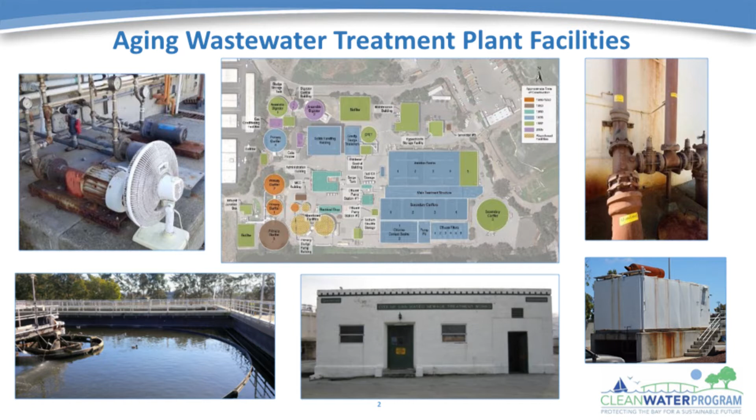And in some peak wet weather conditions, meaning when there are big, out-of-the-ordinary heavy storms, the plant facilities that don't have sufficient capacity to treat the amount of wastewater start to fail. In simple terms, there are leaks and failures, and that is not good. Because of the issues, the city is currently in serious risk of violating these environmental regulations. And that's just the wastewater treatment plant. I haven't even touched upon the other part, which is the collection system.

Typically, a sewer lateral connects your property to the city's collection system. And once it's in the collection system, there is a network of pipes, manholes, and pump stations that help to move everyone's wastewater to the treatment plant. Some of these facilities are multiple decades old, while some are newer. But regardless of if they're newer or older, once they are in the ground, they start to age, deteriorate, and even fail, just like some of the images on the screen. It's a cycle that never stops.

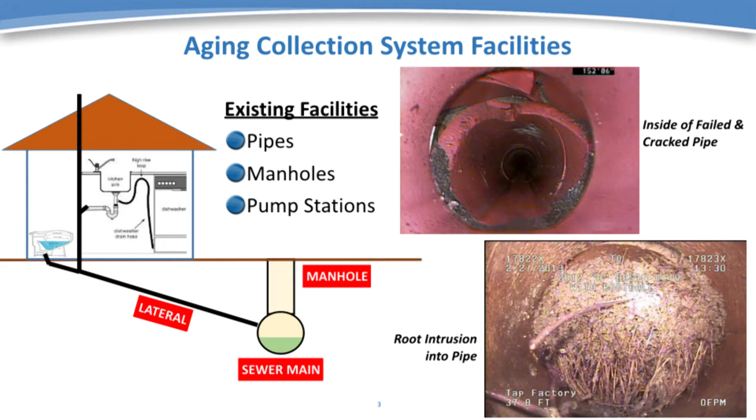So every year, the city uses funds collected through your sewer bills to maintain, repair, and replace portions of the system to help keep it operational. And even with all these annual efforts, there are still capacity issues during peak wet weather events. Now, I keep mentioning the words capacity and the term peak wet weather events. So let me dive into this a little bit more.

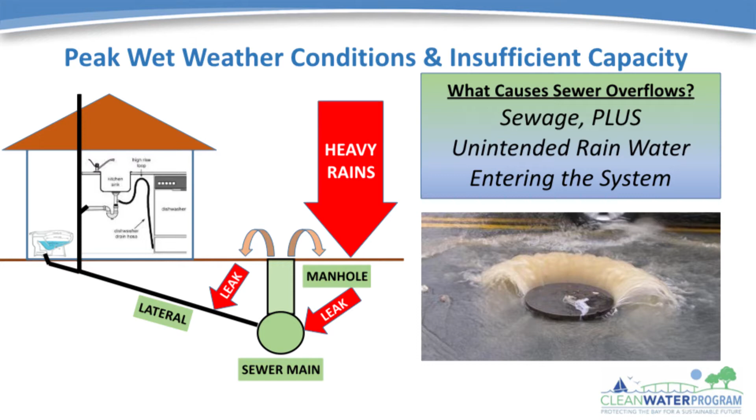During dry weather or normal conditions, such as a nice summer day where it hasn't rained in weeks, the sewer system runs fine and there is more than enough capacity in the system. But during peak wet weather, the rain infiltrates into the ground and leaks into the sewer pipes through the cracks and failures in the system. The heavy rain mixes with the raw sewage and increases the amount of wastewater in the pipe to the point where there is no more room or capacity in the system, and the only place left for the wastewater to go is up. And typically, the city and the community sees these types of overflows occurring in manholes in the streets. These types of capacity failures are called sanitary sewer overflows.

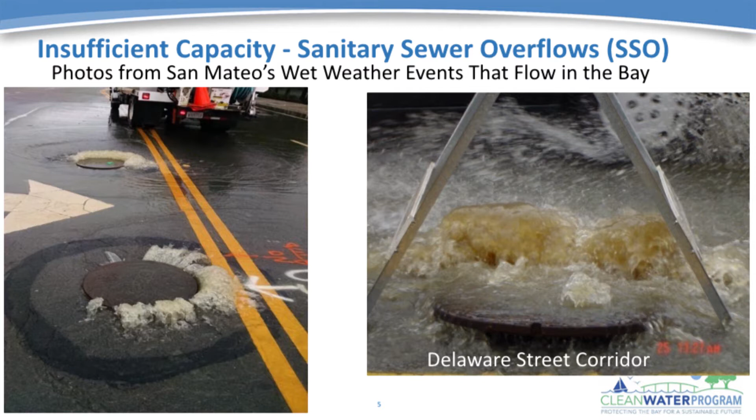We refer to them in acronyms as SSOs, or simply it's an unintended leak. That is diluted sewage overflowing onto our streets. Imagine you have a glass of sewage and you dump it into a bucket. Then you take 10 glasses of clean rainwater and you also dump that into the same bucket to dilute the sewage. Would you feel safe or healthy touching or being anywhere near that bucket? It is diluted, but it is still disgusting, not safe, and not healthy.

These overflows happen in both our collection system and our treatment plant, sometimes for several hours. And once they gush onto the streets, they go into our storm drains. And from the storm drains, they flow into our creeks, then into our lagoon, and eventually into our San Francisco Bay. We've had to put up warning signs at our beaches and close them because of the amount of contamination in the water. This is a significant health risk for both the community and the environment.

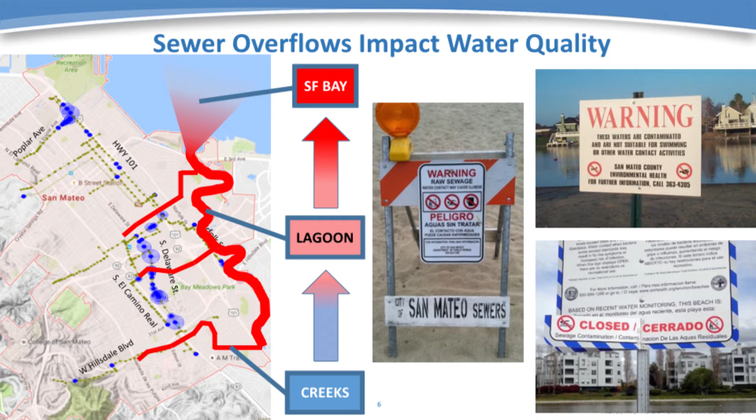This has occurred in the past, and it will, without a doubt, continue to occur in the future if we try to maintain the system the way it currently is. So in order to stop it, we need significant improvements because we need to improve.

Thing is, the city of San Mateo isn't the only one to have noticed. The California Environmental Protection Agency's Regional Water Quality Control Board also noticed, and their job is to ensure that everyone in California is keeping California waters clean. They have done two things to make sure that the city of San Mateo is trying to meet their regulations, or actually meet their regulations.

The first is they've set stricter discharge requirements for our treatment plant, meaning we need to improve our treatment processes at the plant to meet higher levels of discharge quality. The second is they've issued a cease and desist order mandating the elimination of SSOs or overflows, and they're requiring specific corrective actions that we, as a community, have to take. If they say jump, they tell us how high and we must comply.

We're not in a good situation, but the city has a plan to address these issues. It has developed the Clean Water Program, and the drivers and goals of the program are simple and straightforward. The first goal is to replace key components of the aging infrastructure in the collection system and the wastewater treatment plant. The second is to comply with current and future regulations by providing higher levels of treatment and capacity assurance.

This means we are striving to improve the treatment processes at the plant and to eliminate sanitary sewer overflows throughout the entire system. The third goal is to align with the sustainability goals of the city. We want to make sure that what we are doing is good for the environment and good for the community, both now and in the future.

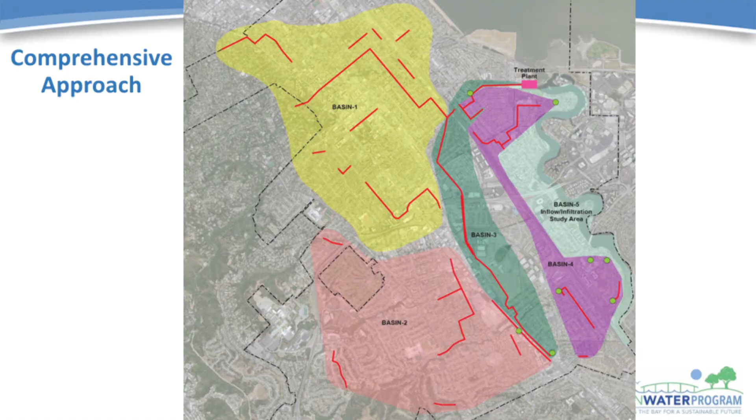The red lines indicate pipeline projects, the green dots are pump station projects, and the pink rectangle in the northwest, or northeast actually, is the wastewater treatment plant. The only thing not shown in this comprehensive map is the location of the underground in-system storage, which will be determined later this year.

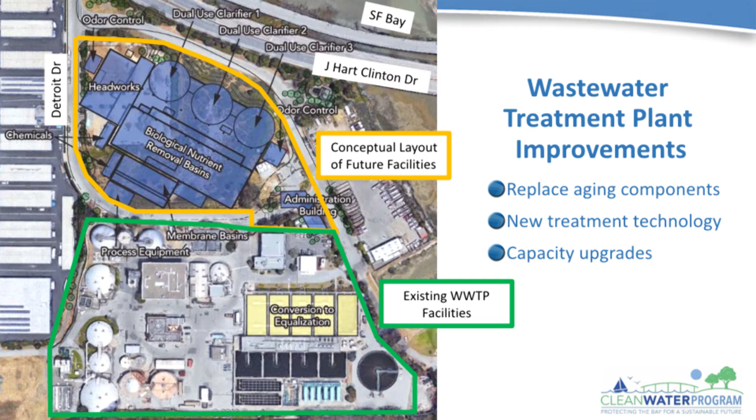The different buildings are facilities that each play a key role in the treatment process. These were first constructed in the 30s and 40s, and since then it has grown and expanded with new facilities. Lots of maintenance and rehabilitations have occurred since then, but there have not been any significant expansion projects for decades.

The upper half, which is outlined in orange, is the conceptual future facilities that will replace some of the older facilities. And these are newer technologies that will help to provide manageability as well as operational efficiencies that will meet environmental regulations and overall improve system capacities.

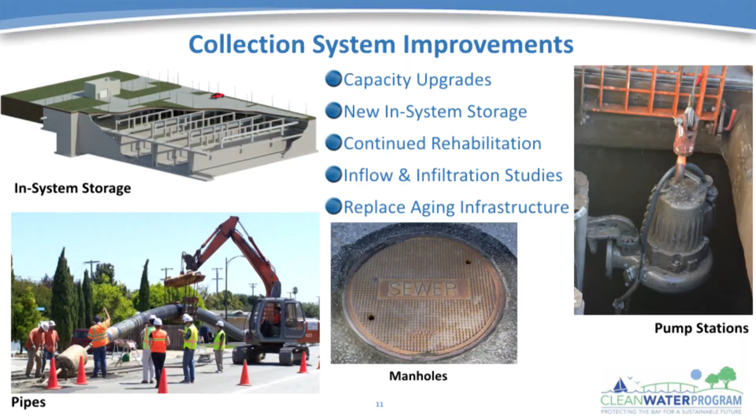Moving on to the collection system, if you remember the comprehensive map, there were a lot of red lines and green dots. And there are significant improvements planned for the collection system. There will be a new underground in-system storage tank. There will also be several pump station upgrade and rehabilitation projects, and there will be a significant number of pipeline projects. The city is also conducting infiltration and inflow studies, along with doing its continuous annual collection system investigations and rehabilitation projects. All of these improvements build capacity and enhance operations and manageability of the system.

These are improvements that are funded by the sewer charges that you provide to the city and allow us to do these improvements. What will happen if we don't do these improvements? First, more aging, deterioration, and failures will occur in our system. If we wait longer, it won't be as reliable. Sewer service is supposed to be continuous and reliable.

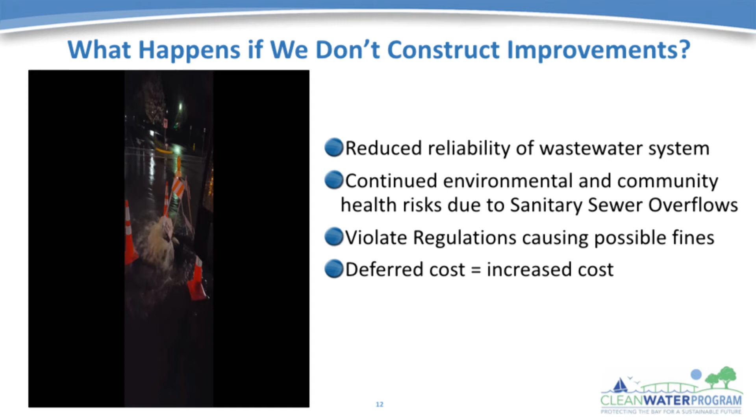In the system's current state, overflows will continue to occur, and this is a big health risk. The Environmental Protection Agency will not like that we are violating the regulations, and this could result in fines to the city that will get passed on to you, the ratepayers. The longer we wait, the more expensive it will cost.

It's kind of like my first car, which was the 1982 280ZX. I drove that thing everywhere, all over the Bay Area, and it got me where I needed to go, most of the time, but not all the time. It also leaked oil on my driveway, and it stopped passing smog tests and wasn't meeting regulations. Just like that, I needed a more reliable car, just as we need a more reliable system that will help improve capacity and meet regulations.

As I said before, infrastructure problems need money to fix. Now, the Clean Water Program and all of its projects is estimated to cost $900 million. This is the cost for the improvements at the plant, the collection system, and ongoing operations and maintenance needs. The initial program was 20 years, and it has been condensed to be implemented over 10 years. This reduction in duration not only saves costs on interest and escalation, it also meets the goals of the program and will provide benefits sooner than later.

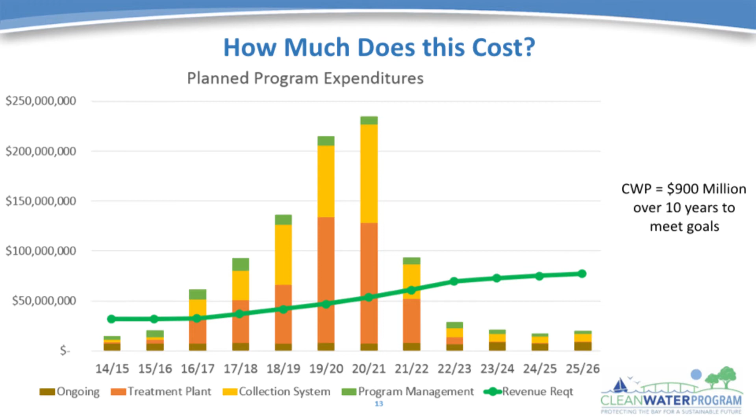The revenue requirements shown by the green line are the amount needed to pay off the financing, and it's kind of like a car I ended up buying to replace my old one. I ended up financing it because I took out a car loan. Instead of paying for the full value of the car up front, I pay a small portion each month. The revenue requirements for the Clean Water Program shown on the graph are kind of like the income that I needed to make in order to pay off my monthly car payments.

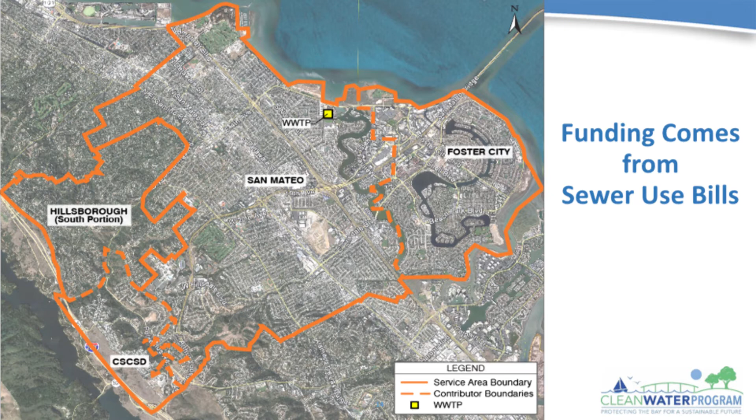So sewer use fees are paid by all properties or entities that connect into the sewer collection system and/or contribute to the flows of the treatment plant. This map shows the outer service boundaries. It's not just San Mateo properties that pay for the service. Foster City, Hillsborough, Crystal Springs County Sanitation District, and several agencies pay for the service and contribute to the revenue needed to fund the program. Essentially, all connected and serviced users pay their fair share.

The current sewer fee structure is 100% volumetric, meaning the more you use, the more you pay, or the less you use, the less you pay. There are two components needed to calculate a sewer fee. The first is the rate.

The charge rate is determined based on revenue needs, and as you saw in previous slides, the revenue needs are growing. The second component is the usage. This is based on average winter water usage, which excludes outdoor irrigation.

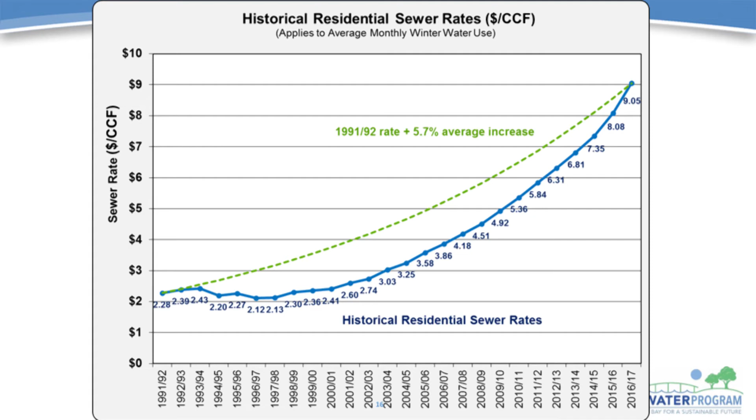These are fiscally responsible rate increases that provided the revenue needed to fund the operational and maintenance costs over the past few years. And due to Proposition 218, the city is not allowed to overcollect, nor are we allowed to set rates above what is required for the estimated revenue needs. The revenue needs have increased due to the improvements needed to meet the regulations, and so the rates have to increase as well.

So, as you know, California has been in a drought the past couple of years, and we've been doing a really good job at conserving water. However, since sewer fees are based on winter water usage, the water conservation efforts have resulted in unanticipated shortfalls in sewer fees collected over the past few years. This slide helps to illustrate an example of these impacts.

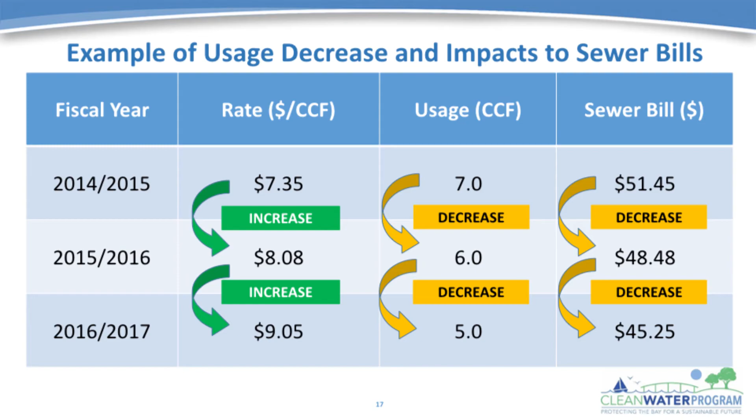Between fiscal year 14-15 and 15-16, the city raised rates by 10%. The following year, it raised rates by 12%. Ideally, the goal of this was to increase the revenues that were brought in through sewer bills. The sewer rate increases bumped up the rates from $7.35 to $8.08 to $9.05.

And even though the rates were being increased, there was an unanticipated decrease in the usage, which negatively impacted the fees collected. Even though the city raised rates, lots of properties still did not pay even more. They basically paid the same. In other words, the actual revenue received through sewer fees has been lower than the anticipated target revenues.

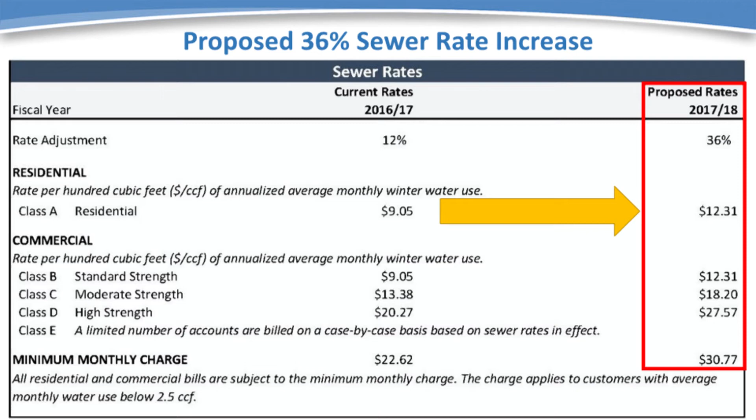I also wanted to talk about the usage part of the equation. Over the years, the average usage has decreased, and it is currently around 500 cubic feet of usage per month. To give you a sense of perspective, 500 cubic feet is approximately 125 loads of laundry or 150 showers that each last 10 minutes. That's the average usage per month. There are also properties that are low users, and there are properties that are high users. Now remember, because of the 100% volumetric structure, the more you use, the more you pay.

So let's focus in on the average user indicated with orange arrows on the slide. Currently on the left side, the monthly sewer charge is $45.25 for the average residential dwelling unit with 500 cubic feet of monthly winter water use.

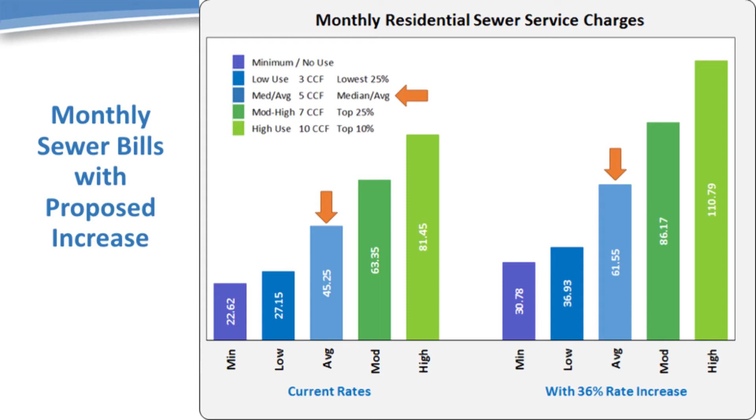The proposed 36% rate increase would increase the average charge amount to $61.55 per month. Remember, if you use more, you'll pay more. If you use less, you'll pay less. The minimum monthly charge also would increase from $22.62 to $30.78.

I also wanted to point out that this only shows the updated numbers for City of San Mateo's increases. Currently, many of our neighboring agencies are also undergoing the Proposition 218 sewer rate increase as well. And so once they are done with their increases, the overall landscape of this chart will change.

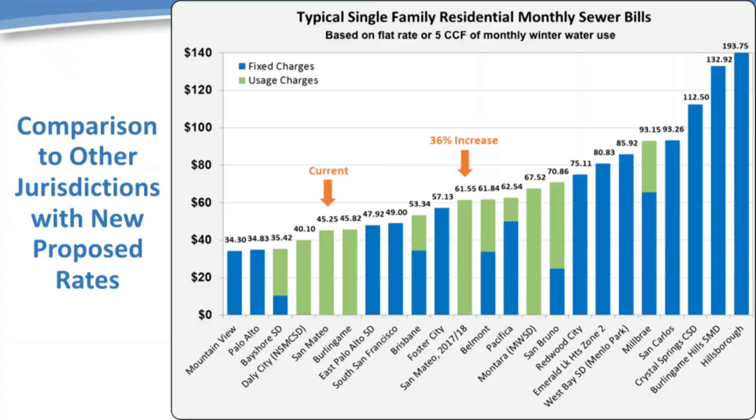Now that you know the proposed sewer rate increase for fiscal year 17-18 and how it compares to our neighbors, I wanted to conclude with saying that we aren't just raising rates just to do it. The increase is supposed to align our actual revenue needs with our target revenue needs. It will help to fund the city's continuous operations and maintenance activities, as well as help to fund the projects and improvements of the clean water program needed to replace our aging infrastructure, meet current and future regulations, as well as align with the city's sustainability goals.

Now, I wanted to transition to talk about planning for the future. To plan for the future, the city wants to establish revenue stability and predictability. Planning efforts and studies continue to be conducted on how the city should establish this stability and predictability. And there are two key ideas that I want to preview with the community through this presentation. This year, the city is proposing a single-year 36% rate increase. The two key rate considerations that I want to preview with you today are, the first is rate restructuring, and the second is multi-year rate increases.

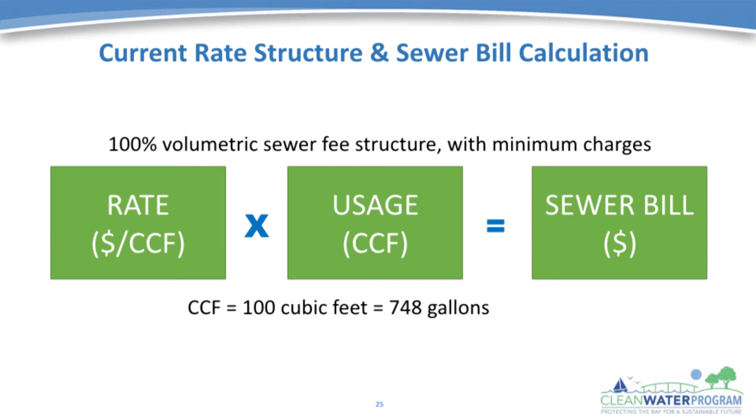Remember this slide? I want to share this with you again to remind you that the current rate structure is 100% volumetric, meaning the more you use, the more you pay. And remember this graph also? One thing that I didn't talk about on this slide the last time was the different colors for the bars. We added a larger legend indicating the green bars are for volumetric charges, while the blue bars are for fixed rate charges. You know that for 100% volumetric structures, the more you use, the more you pay. For fixed charges, it doesn't matter how little or how much you use. Residential properties typically pay the same fixed amount regardless of usage.

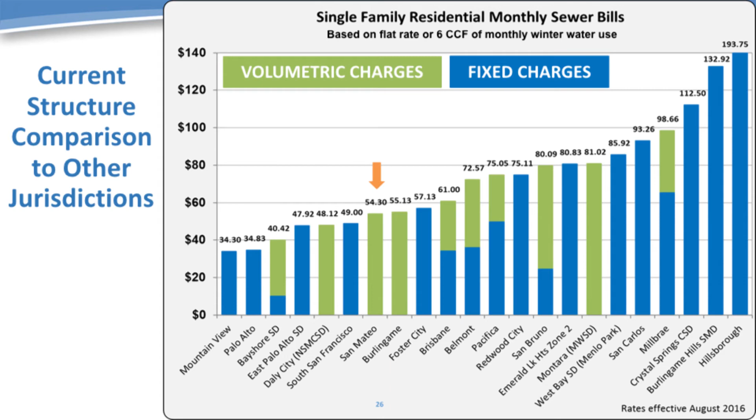If you look across the chart, there are 12 agencies that are all blue and have 100% fixed structures. 4 agencies have 100% volumetric structures, one of which is the City of San Mateo. And lastly, there are 6 agencies that have hybrid structures. Please notice that not all the hybrid structures are the same. For example, Belmont in the middle looks to be 50% volumetric and 50% fixed. Bayshore Sanitary District to the left looks to have a higher percentage of volumetric charges, while Millbrae on the right looks to have more fixed charges than volumetric charges. Each agency's revenue needs are different, and so their structures and average charges are set up accordingly.

There are pros and cons and social aspects associated with the two rate structures. The green and blue boxes have points about each structure that I want to highlight with you today. Let's look at the top lines in each box first. For volumetric structures, the more you use, the more you pay. The users that are most impacted by this structure are high users because they get higher charges. For a fixed rate structure, you pay the same regardless of use. In this scenario, the users that are most impacted are low users because they end up paying the same as high users. There are social aspects that need to be communicated and considered when looking at these two structures. Now let's take a look at the second line in each box.

Volumetric rates are unpredictable for both the users and the city. Overall, the past few years, usage has decreased below what was anticipated, and as a result, there is a revenue shortfall and a need for the proposed 36% rate increases.

On the complete other end of the spectrum, the fixed structure provides greater revenue stability. This is because it's not linked to the unpredictability of usage. Both the user and the city can predict how much they will respectively pay and charge.

Now, on the last line in each box, it says volumetric aligns with distribution by usage, while fixed aligns with equal distribution. The existing wastewater system is currently being operated and maintained by the city and is used more by high users and less by low users. If no significant improvements are made, then it makes sense to continue distributing charges by usage, which aligns with the current volumetric structure.

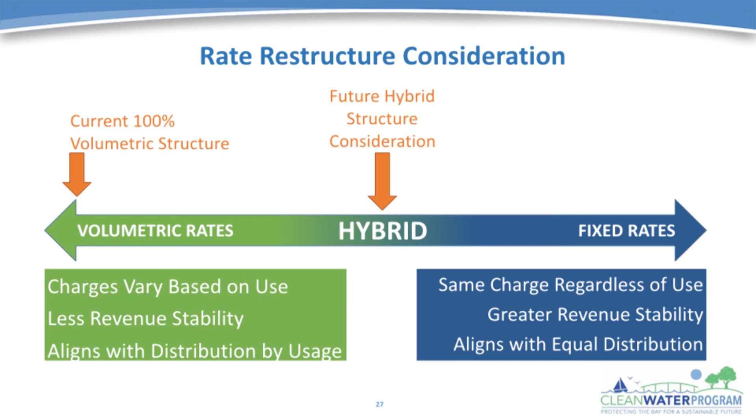The fixed fee is kind of like my monthly car payment, or your monthly car payment. You will know how much it costs each month. The volumetric component, however, is like the amount of gas you pay each month. The more you drive, the more you pay. But in order to get the whole experience, you need to pay the monthly fixed fee as well as all the gas.

Thing is, if I wanted to drive off the car lot with a low interest car loan, I needed to prove that I had stable income to pay the monthly car payments. A transition towards including a fixed fee into the structure will improve revenue stability. The city will need to analyze the different structures before presenting anything further.

Some of our neighboring jurisdictions have established multi-year rate increases. What this means is that for their Prop 218 process, they didn't just request a one-time increase. Instead, they indicated each percentage increase for a series of multiple upcoming years. Some agencies utilize 3 years to 5 years for their multi-year increases.